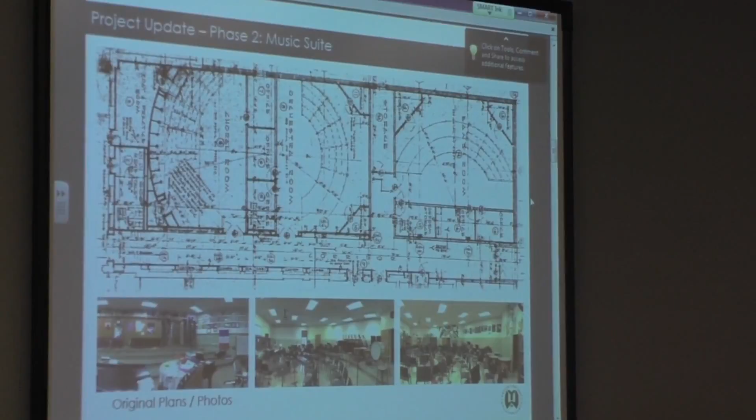One of the major features is going to be the music suite renovation. These are actually the original floor plans of the music rooms, and they haven't changed too much since then. They've been described as prison-like and outdated. They've had a lot of issues with storage and a lot of inflexible spaces that sort of don't allow them to function the way contemporary music rooms should.

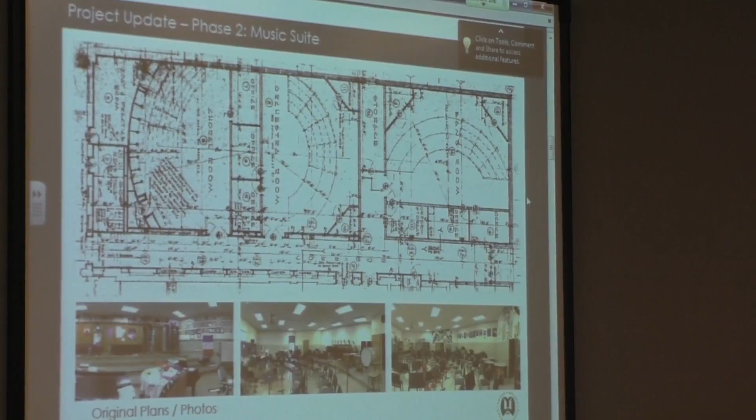We wanted to do basically a major gut of this area, but the State Historic Preservation Office actually threw a little bit of a wrench into the whole plan when they determined that a lot of the design features of the original were character defining of 1950s design. So initially they didn't want us to change anything. So we worked with them for a really long time to be able to gain back some of that design freedom and allow the whole rooms to really be modernized.

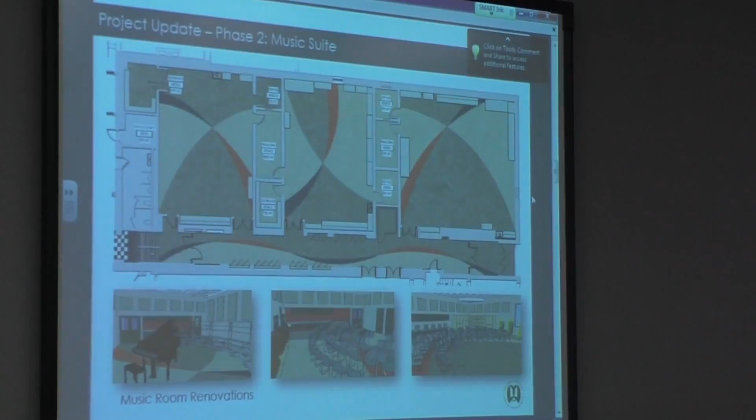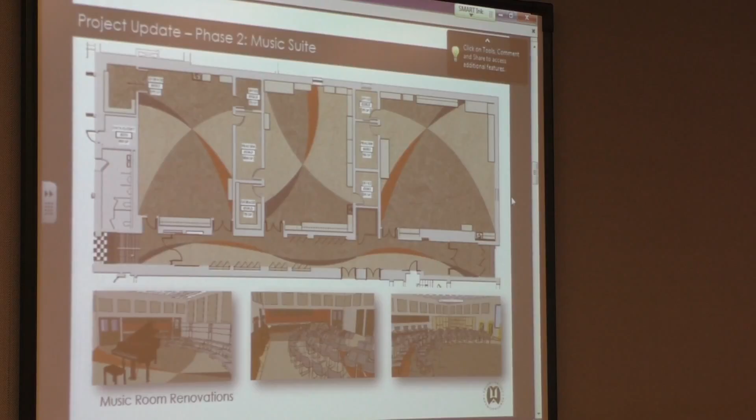All we really had to leave were some of the original finishes in the vestibule, so we found unique ways to reference the original floor plan. They allowed us to do some really cool things in the ceiling, which opened up a lot of opportunity for the school to incorporate their branding and some fun finishes that give life to this area. If you look at that little swoosh design, it's actually inspired by a music staff and how the notes bounce up and down - that was the inspiration for the entire design team.

The next major portion of the project at the high school is going to be the replacement of the windows. Those are not the original windows - those are the 1980s replacement windows.

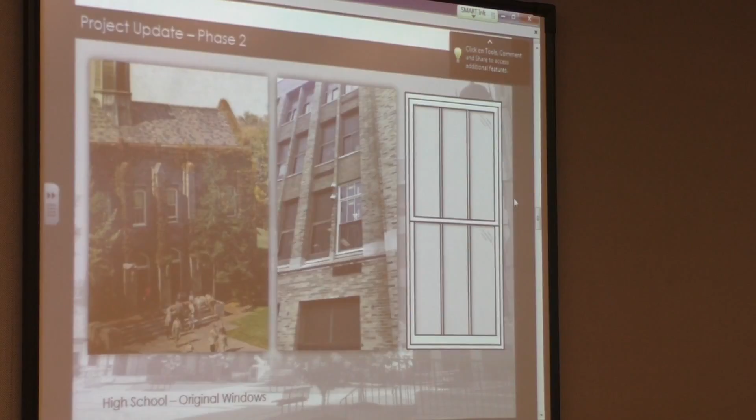If you look at the picture on the left, those are actually what the original windows look like. So we worked with the district to bring back the original look of the windows, but make sure it's going to be something that functionally works for them as well. That middle picture is actually a test window we installed at the high school, so everybody has a chance to see what it looks like, how heavy it is when you open it, and how the locking mechanism works. SHPO had one change - we had originally had a fixed panel at the top that would conceal some of the drop ceilings that were lowered over time. They didn't really like that. They wanted to see the original windows, so we just have to remove a couple drop ceilings to a certain extent. Other than that, there really shouldn't be any surprises with this window.

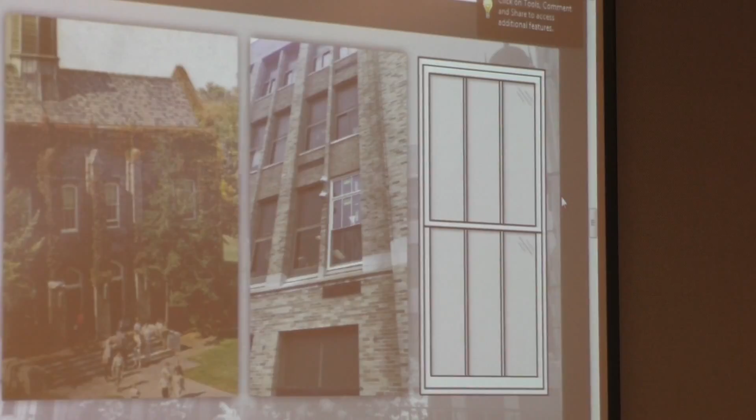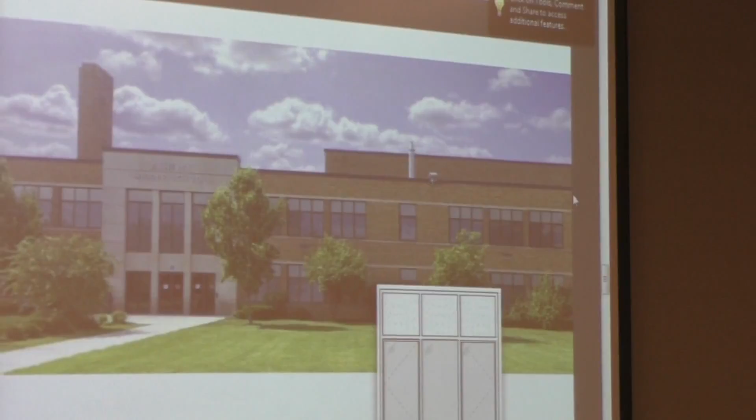Here at the middle school, these are pictures of the original 1980s windows with a dark fixed panel above. The configuration is going to be mostly the same. There's a lot of drop ceilings in other areas of the building, so we're going to have an obscure painted glass at the top that allows light through. That's going to be a major difference, and the windows will operate totally differently too - there will be casement windows that open sideways on each side of each window, so there's going to be a lot of ventilation in here.

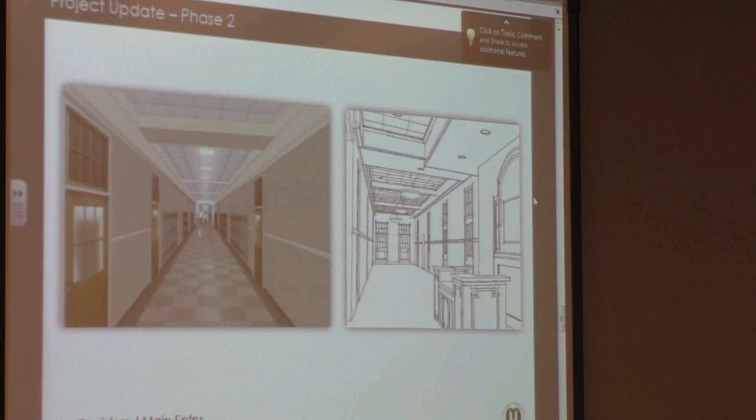Back to the high school - this is a photo of how the corridors currently look. The floor does look that brown due to years of wax buildup. So we are going to be restoring the original terrazzo floors, getting some of the original colors back, painting the walls, putting in new ceilings, new desks at the main entry. We really feel like we can brighten up the space and add a lot of grandeur to the main corridor. There's going to be some nice feature lighting as opposed to the standard 2x2 lighting we see in most corridors.

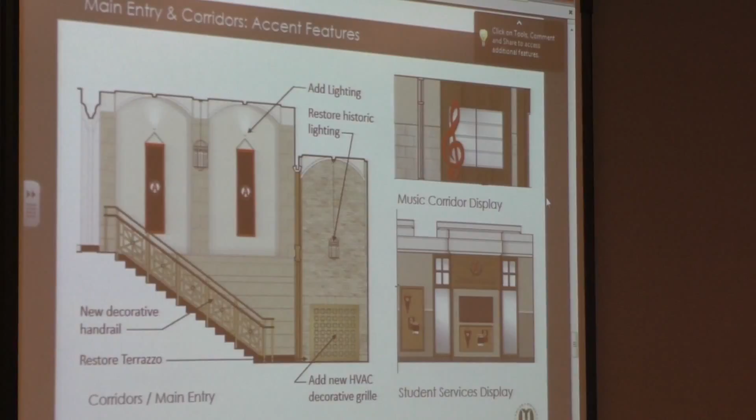On the left is an image of the main stairwell when you first come in. It's going to be getting a new railing, and the original terrazzo tile is going to be cleaned up and restored. The original light fixtures are also going to be receiving new LED lights so they're a lot brighter, more energy efficient, and don't need to be changed as often.

We're also going to be adding a lot of design accents to specific places in the corridors. In the music room, that image on the upper right, we're going to put a nice feature display for their awards and things they win, to bring the Amherst pride and really showcase that. Same with the student services area - just to create a feature there, a focal point, so that when people are visiting, that area where you tend to get a lot of parents visiting, they know where it is. It has a sense of place.

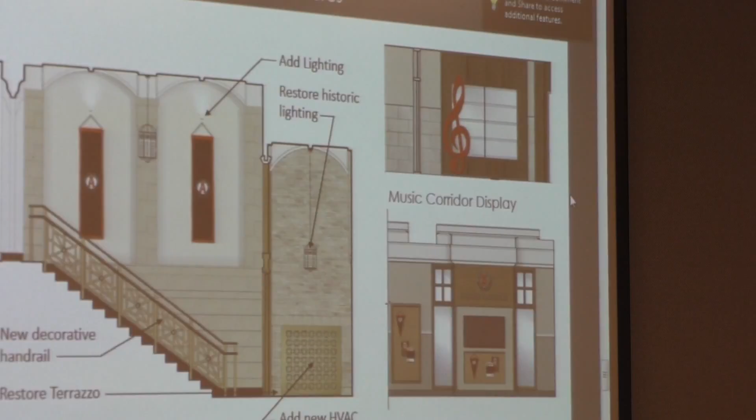We are also putting new lockers in. That's going to be huge, to have consistency, because some are recessed, some are red, some are green, some are built out. We'll have the same lockers consistently throughout all the levels of all 3 floors.

I think the last major portion of the project is really this parking area out here. And it's more than just paving the parking lot. Safety was a huge concern, and improving pedestrian and traffic flow.

At the top of that is the main access drive going down here. There's currently a space for people to pull aside and park. During games it's an issue because kids go back and forth between the field and the cars, and it's very easy to have someone step out in front of you while you're driving down that access drive.

What we're doing is putting a curb there so people won't be able to park on that side of the access drive. They'll have to go into the main parking area. There's also going to be a lot of sidewalks added so everybody knows where they should be stepping, and we're safely taking people all the way from the building to the street, so you don't have to cross paths where people aren't expecting it.

The other thing we're trying to improve is the separation of bus traffic from faculty and staff. Currently it's really easy for people to cut across at weird angles in the parking lot, so we've created some areas that jut out a little to really stop people from going through.

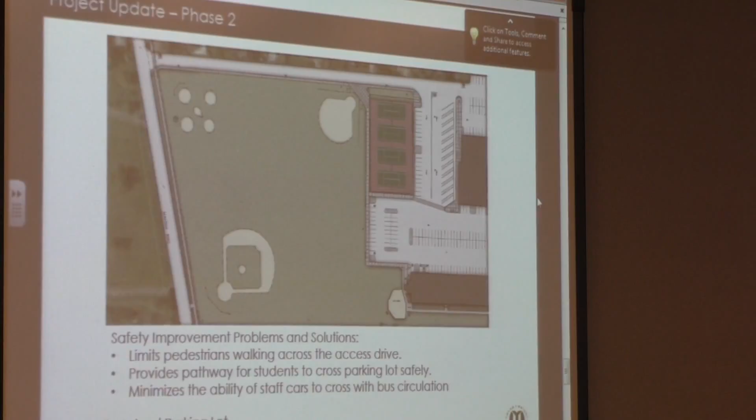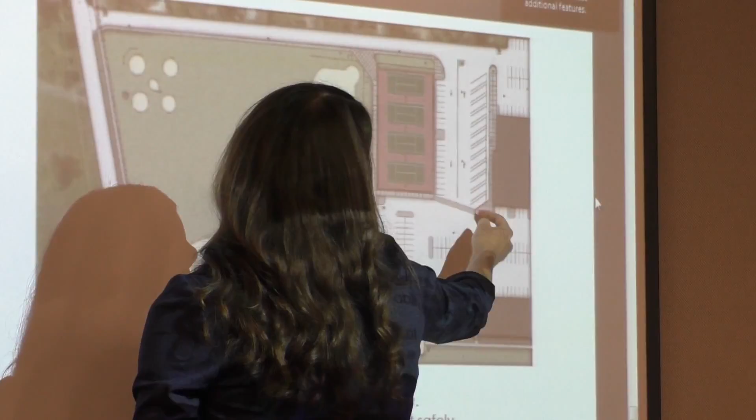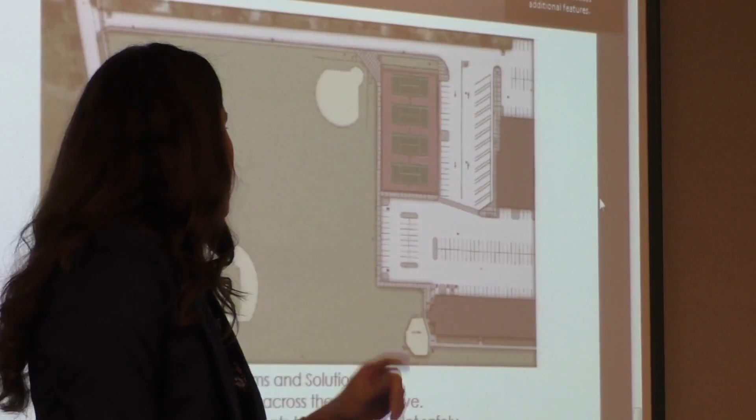It's probably easier if I point it out, to stop people from cutting across from here to here, or here to here. These are going to be raised sidewalk areas so people more or less have to follow the pavement markings. We're also expanding the parking a little over here and providing a dedicated area for the smaller buses to drop students off closer to the building.

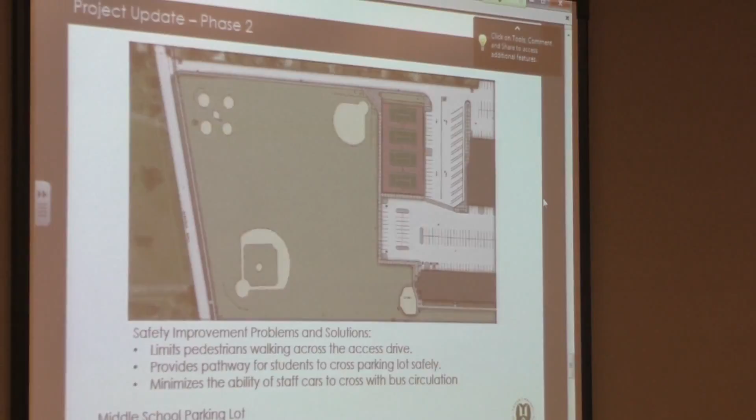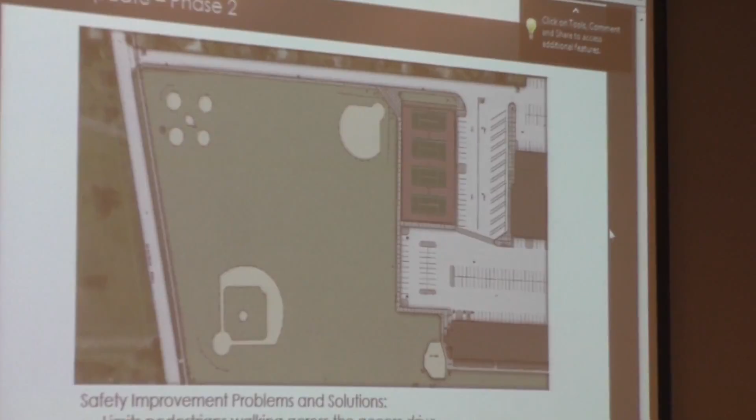I think that pretty much wraps up my portion of the summary. If you go back one -- the other thing that's notable is the parking lot doesn't drain very well when we get a heavy rain. So we've done some scoping under there, and there are some storm sewer issues that will also be repaired.

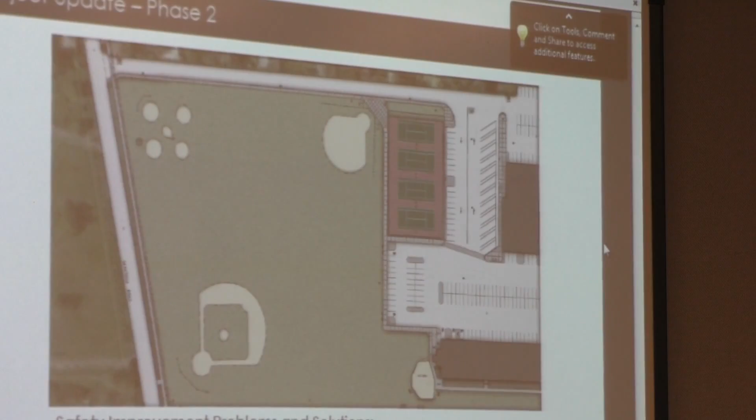So a majority of that parking lot will be a full replacement, all the way down to the stone. There's a portion closer to the building, back where the dumpster is, where we're able to just mill and top it. But there will be repair of the storm sewer, because if you've been here during heavy rain, you'll notice it actually builds up quite a bit. So that will also be taken care of.

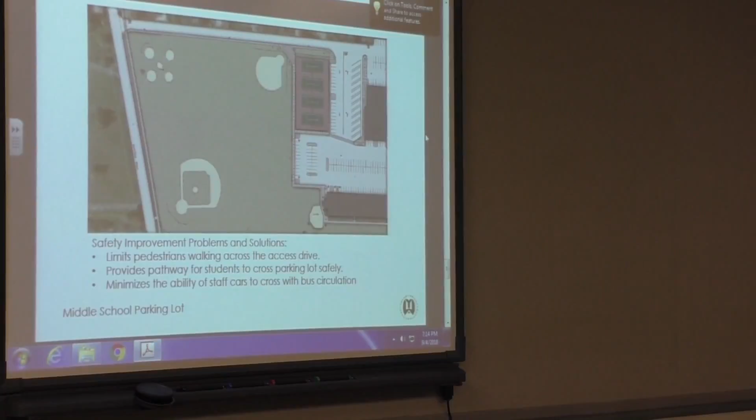It's hard to tell, inspector -- is there still a sidewalk on this side also? No. I think the goal was to keep people on one side without having to cross the access drive. Yeah, I think originally we had talked about having a sidewalk on this side too, as an alternate. Yeah, that would be nice.

So it is currently in the plans as an alternate, but due to the storm sewer surprise we had, we had to make some decisions and try to save money in other places, so it's an alternate. As the project progresses into phase 2, if money's available, we'll be able to add that in there.

Mr. Rampato, not to put you on the spot, but there's something that's going to be required because of the size of the parking lot under the ground -- a basin or something, as part of the storm sewer work. Correct. So an underground retention system is added, I believe, just in the grass area adjacent to the current playground.

It helps give us additional underground capacity for the stormwater, because environmental laws require you to contain it on site at a certain capacity before releasing it out to the storm system that the county or town owns. That was an additional cost that was unforeseen, until we realized the extent of the storm sewer damage. Basically we were presented with the dilemma where if we were to just mill and top the parking lot and not address the underground structural problem with the storm sewer...

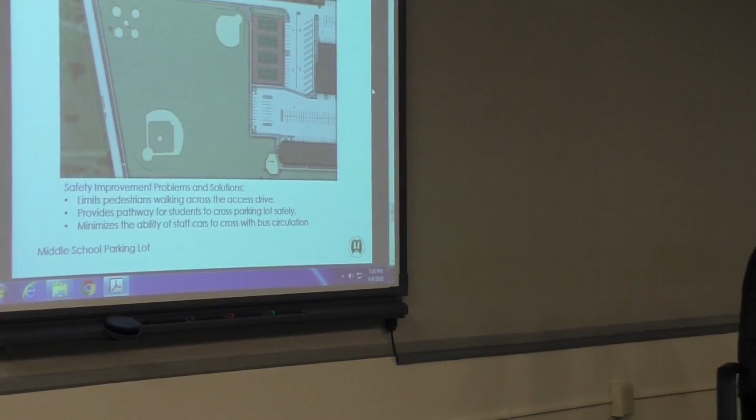That area of parking lot adjacent to the tennis courts is also extended. It looks great in that image, but we're actually adding parking there. And the tennis courts and fencing are also being redone, similar to the ones at our high school.

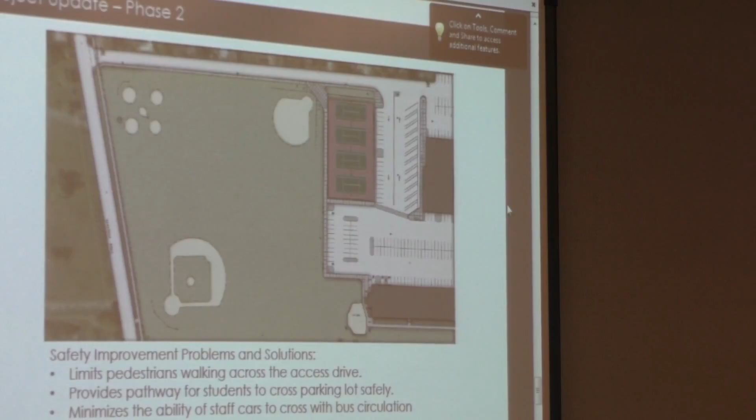I think that responds to the person who parked along the drive who said, now I have farther to walk. We put parking right alongside the field there, so they could park there, and it's not a very far walk from there.

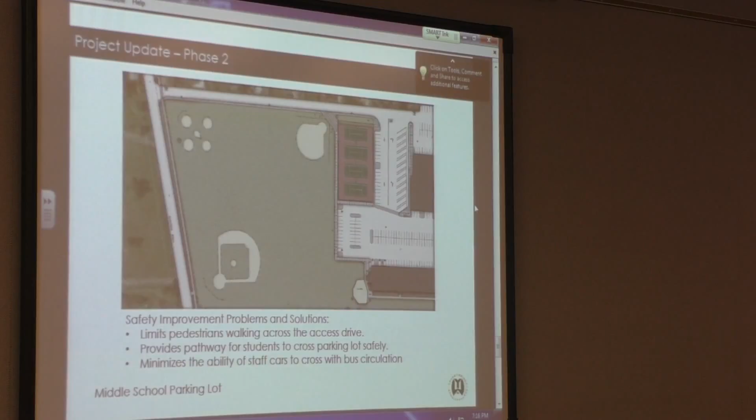Originally there wasn't really parking intended for that area. I think what happened over time, as I'm told by our head custodian at the middle school, is that people would park there out of convenience, but it was mostly grass and mud, and there wasn't really a way to prevent people from parking there. As a result, when they did the roof repair at the middle school, they had stone left over, so they spread it there to try to eliminate some of the damage from cars parking on the grass and dirt and mud, which then almost invited people to park there.

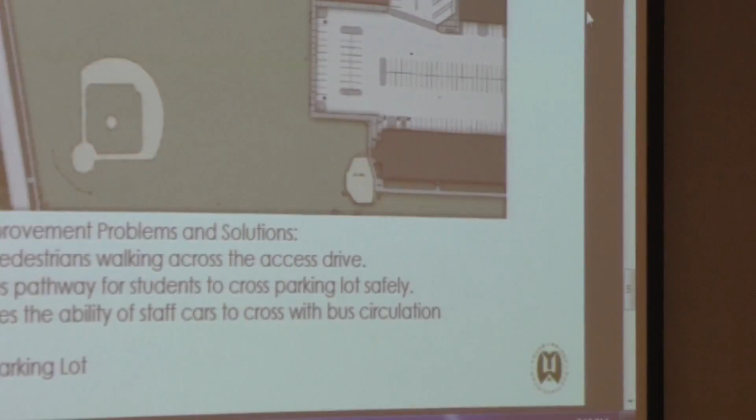So we're looking to clean that area up and create some distinct curbing for safety. Anyone who's been to one of our softball games out there, that's our varsity softball field, knows that the visitor side is along that access road, and often visiting fans put their lawn chairs or stand on that access road, and they park there.

And as Jackie mentioned, there's often traffic going back and forth between the cars and the field, with people leaving or coming in as well, so it creates a significant safety hazard. I think this plan does a good job addressing that, and also addressing the pedestrian walkways for our spectators.

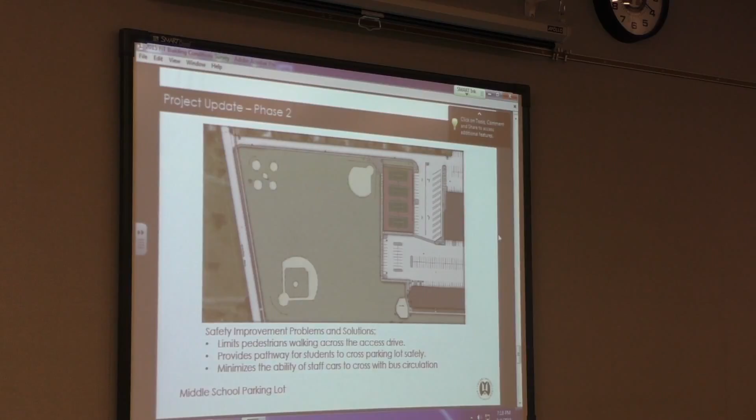How many spaces were you able to add over here? I don't know offhand, but I know it's more than what there is now. There's a concern at certain times of day that it's difficult to find a parking spot this close to the building, so there will be improvement.

I'd say it's in the neighborhood of 20. Which would offset what you lost by the road? No, it doesn't offset at all, it's only about a third of the spaces that are lost from people parking along the road.

You'd notice though, even when we have concerts or big events, there are a lot of times where the parking lot is actually empty, but people park all along that access road because they don't think to come all the way in and use the parking that goes all the way to the area behind the middle school. Once folks get used to coming into the parking lot and past that bus loop area, there's a significant amount of parking that goes unused during events because people just don't go far enough to see it.

So we may need to get folks used to it, message it, and have some people out there waving people in when we have larger events.

Give you one of those yellow vests. I have one. And a hard hat.

And I assume the special education bus, or special needs bus, can still fit through there. Yeah, we tested that along with the ones up top too, to make sure they could make that turn coming out of the bus loop without having to back up.